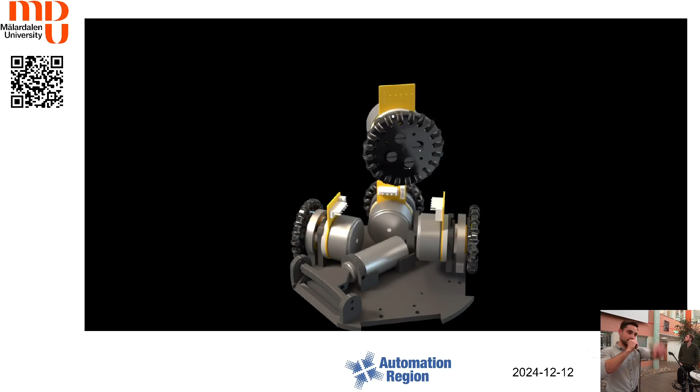Next, we will have a short demonstration of the robot that we actually built, and you can see it inside the room after this presentation.

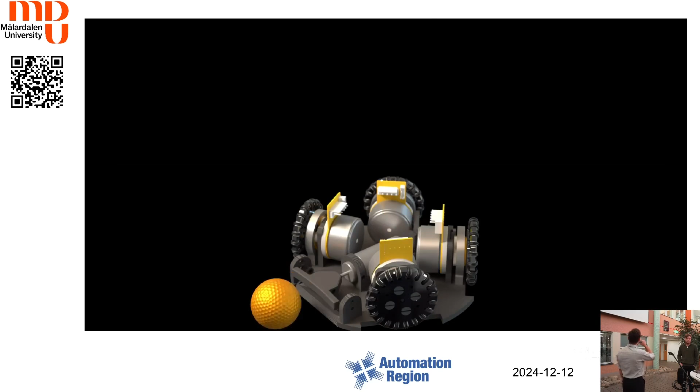I mentioned RoboCup twice at least. By raising hands, anyone of you not from my team, does anyone know what RoboCup is? One hand, two, three. A few. A lot of you don't even know what RoboCup is.

I expected it. Shortly, RoboCup is a competition designed to foster research in robotics and artificial intelligence, with the ultimate vision to compete in the FIFA World Cup 2050.

Very interesting. RoboCup has different leagues: small size league, middle size league, big size league, etc. We chose to compete in the small size league, which we call SSL. There you can see a quick picture. We have 2 teams, 6 robots in each team, and we have a golf ball - it's hard to see, it should be there somewhere. We will show it in further slides.

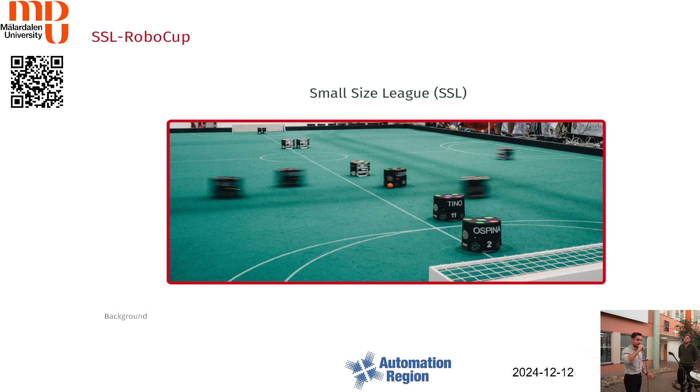SSL requires that we have 6 robots that automatically play football, which requires advanced algorithms for decision making, multi-robot coordination, and real-time problem solving. For that, we also focused on communication - we wanted to improve communication between the robots. Then we wanted to improve the vision system to clearly see the ball and the robots around. Lastly, to improve decision making, which is the AI, to take different decisions in different situations during the game, hopefully the right decisions.

Our goal was to build one robot, successfully verify and validate it. We will see if we came that far in further slides. I'm also pleased to mention that we had collaboration with Colombia and Panama. Teams from these countries helped us solve problems and get one step further to the new world of innovation.

With that being said, I'll leave the word to the hardware responsible. Hello, my name is Pontus, and I've been working alongside Muda as the hardware team leader, leading the hardware team in developing the robot. Today I will walk through how our robot functions and the components behind our design and how it works.

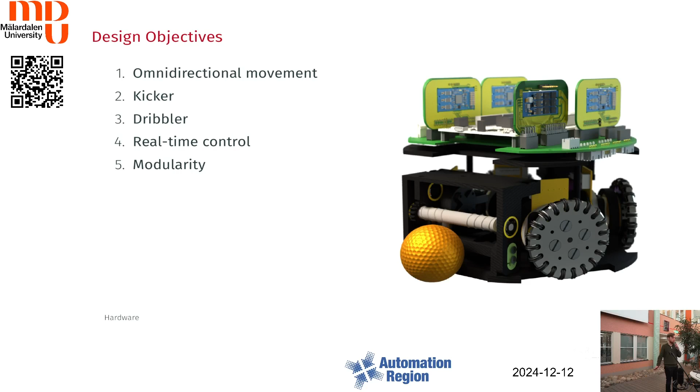In our design, we also thought about it being modular, so if a component breaks, it should be easy to swap out, or if future iterations of this project have improvements, they should be easy to integrate into this robot. Following the design objectives, we are using 4 brushless DC motors paired with Omni wheels in the configuration you can see here, which allows us to move the robot in any direction.

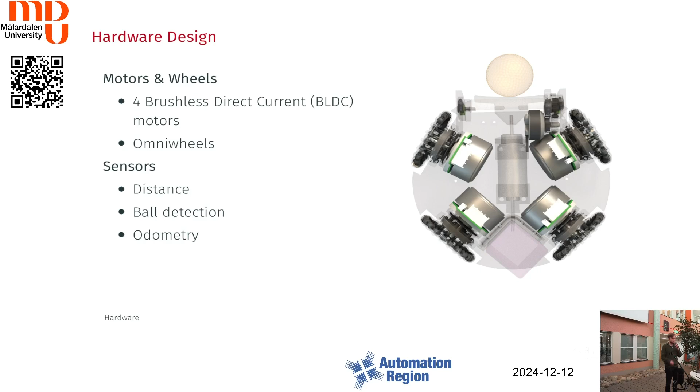And it has sensors as well, for detecting the other robots, ball detection, and odometry. Here are the sensors we used, chosen together with the team in Colombia to ensure we could collaborate and develop the hardware interface together.

We're using optical wheel encoders for the wheels to calculate the RPM of each motor. The motors also have Hall sensors integrated for precise motor control using field-oriented control. The robot also has a 9 degree of freedom IMU used to gather data for odometry. It has short and long range LiDAR to detect other robots and the distance to them, and lastly 2 sensors to track and sense the ball using an RGB sensor and a camera.

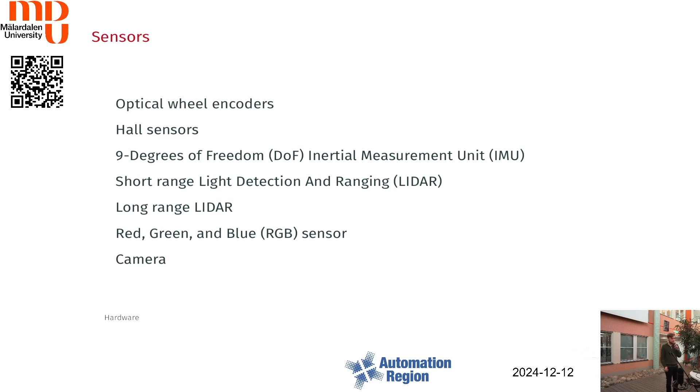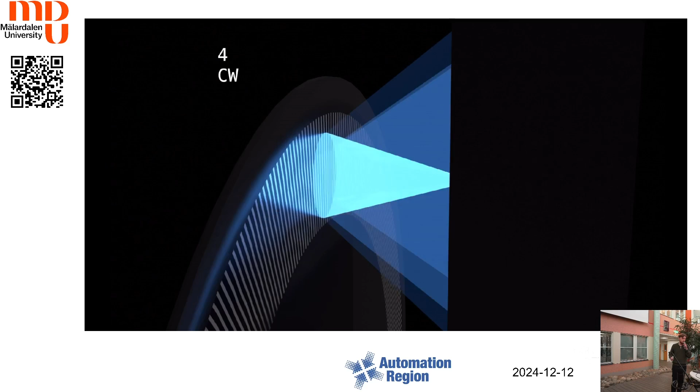Here's an animation of the wheel encoder and how it works. It has 2 receivers, a blue LED, and a disc attached to the motor shaft. When the LED emits, it hits the receivers, and that way we can know which way the encoder is spinning.

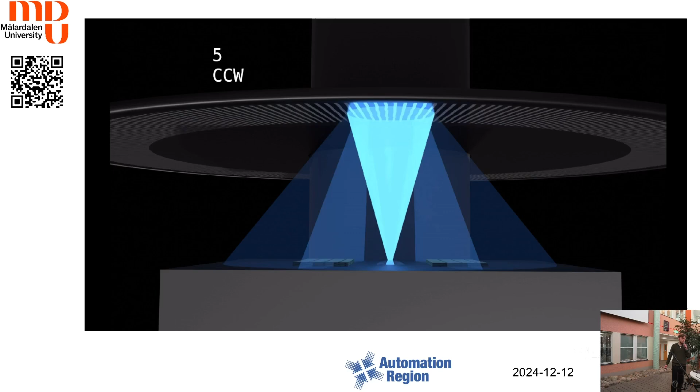We try to use off-the-shelf components wherever possible, but due to the size constraints of this robot, we needed to do some of our own design. We made a custom PCB where we integrated the power distribution and the data lines from the sensors to the microcontroller, and sockets for the electronic speed controllers.

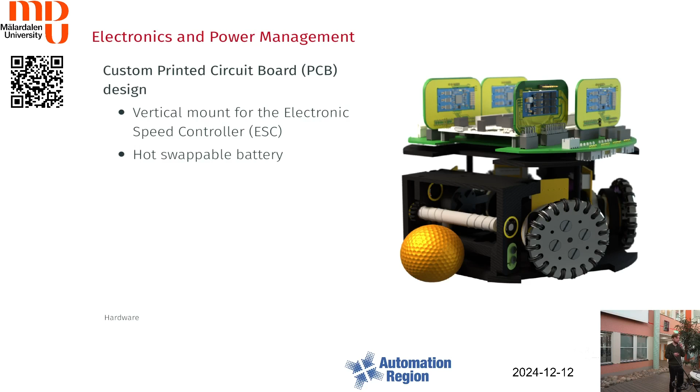We're using 5 BLDC motors in this robot, and each one requires its own motor driver. To fit this in the robot, we needed to mount them vertically, so we made an adapter for those - these are the blue ones here. The PCB also has 2 ports for power, to be able to hot swap the battery, so if one is running low we can plug in a new one without having to restart.

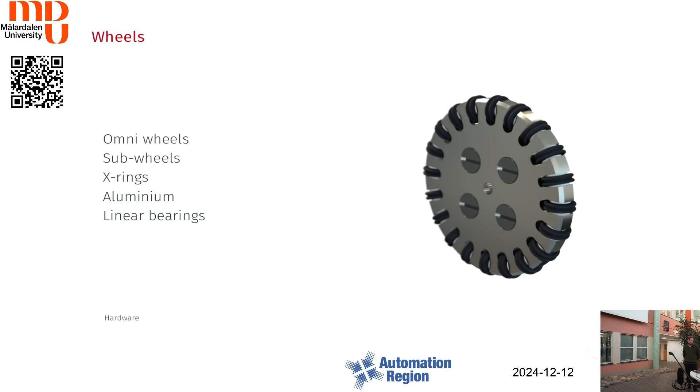The plastic just breaks. We have linear bearings, which we'll see in more detail. We have a linear bearing made out of TPE, and a linear bearing on each side made out of nylon. This helped reduce friction and helped dampen the wheels.

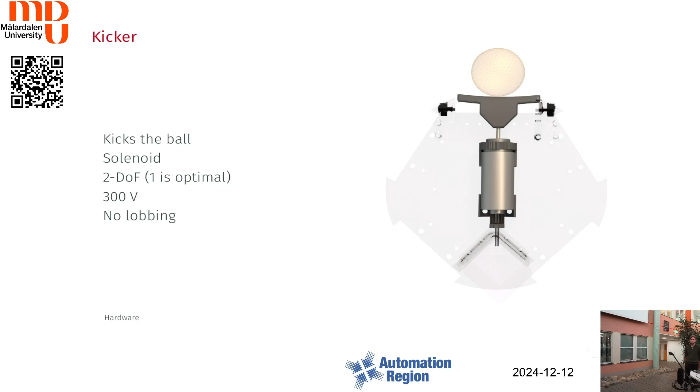Moving on to the kicker. As the name suggests, it kicks the ball, and it uses a solenoid - this part here, not very visible in the slides. It has 2 degrees of freedom, sadly, since the solenoid can also rotate. Optimally it should be just 1 degree of freedom. We use 300 volts to kick, and it has no lobbing capabilities. In more advanced teams, you can see they're actually capable of lobbing the ball, which is very impressive.

Moving on to the dribbler. It might not be very visible here, but it's a white bar with a spiral form. It's used to more easily control the ball. When you spin it at up to 20,000-30,000 RPMs, it will center the ball and keep it attached to the robot almost. It has some ball bearings to reduce friction - it's poorly visible, but there, and there. This, once again, to reduce friction.

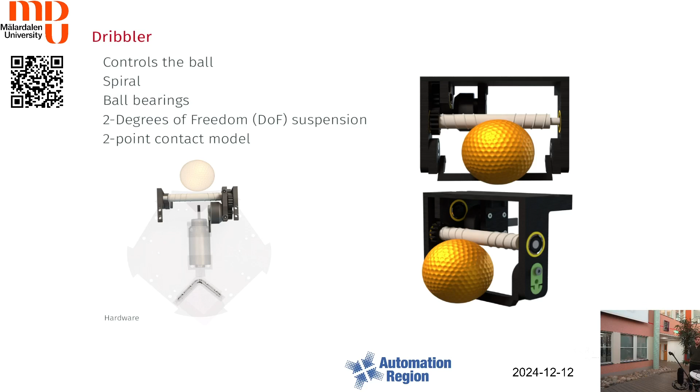We can also see the suspension visible here in green. It has 2 degrees of freedom, since we can dampen both in this direction and in this direction.

Moving on to the software. AI - my name is Victor Eriksson, I am responsible for the AI model in this project.

So we need a simulation environment, and in this case we have here grSim, provided from a previous team from Amirkabir University of Technology. From here we can communicate through the local host network interface, and get the positions and velocities of the robots and the ball, which we cannot see so clear. Also in the simulation, we can send in actions such as rotation and velocity for each robot in both teams.

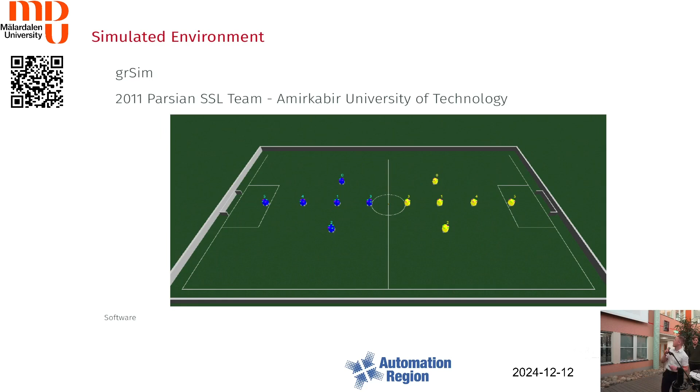So the AI model is a multi-agent proximal policy optimization, also known as MAPPO. It's a reinforcement learning model, meaning it learns from its previous actions and feedback - the more it plays, the more it learns. MAPPO is designed with a policy network and a critic network. In football terms, we can say the policy network is the player and the critic network is the coach. Together, both networks can be informed by predictions and estimations to get players to achieve a teamwork strategy. How well a team performs is assigned by us.

In our case, we have put that the distance to the ball is a negative value, so we want the players to get as close to the ball as possible to get a high reward.

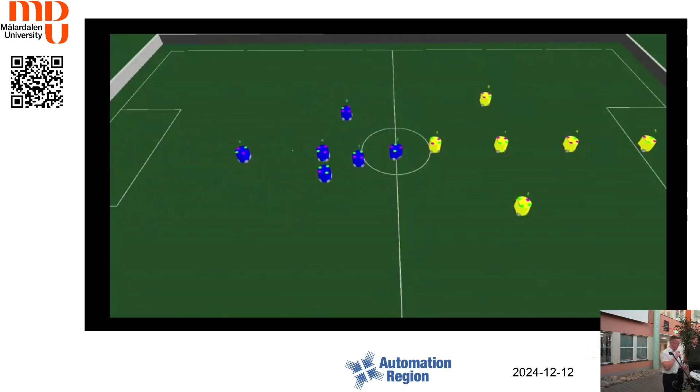The thing is that we could not really verify or train this model fully because it would take a lot of training iterations, and as we've seen from previous papers, we need a lot of them. It takes a lot of time to just do one iteration, and we're running this in just one instance. So sadly, we were not able to verify and train the model fully to see if it actually works as we want.

A critical part in our infrastructure is the use of ROS, or Robot Operating System.

I now regret my choice of colors, but we use it mainly for communication, since it gives simplicity. It's very easy to communicate. We can use topics, and then we have a subscriber, which is the one who obtains the information, and a publisher, which publishes the information to the topic. We also take benefit from its modular and reusable libraries.

One of these in particular, nav2, which offers localization, navigation, and path planning, all with very good performance. This helps save both time and effort, since we had something we knew worked well. There are two different versions of ROS we use, ROS 2 and MicroROS. We'll now see some more about MicroROS.

My name is Emil, and I've been working as a software developer, mainly responsible for IP communication and much of the hardware interface, the hardware drivers. I'm going to talk about the software we have in place in order for our AI path planning to be able to interact with the outside world.

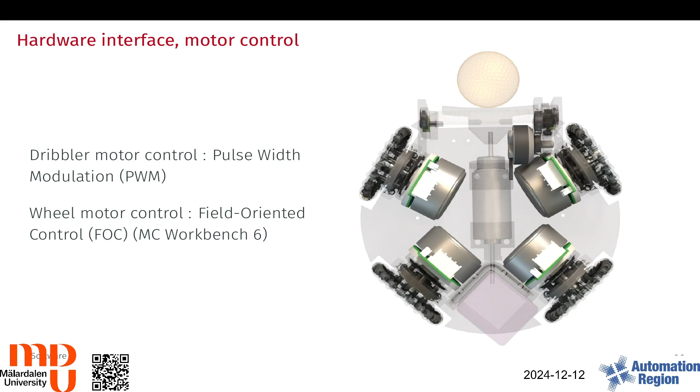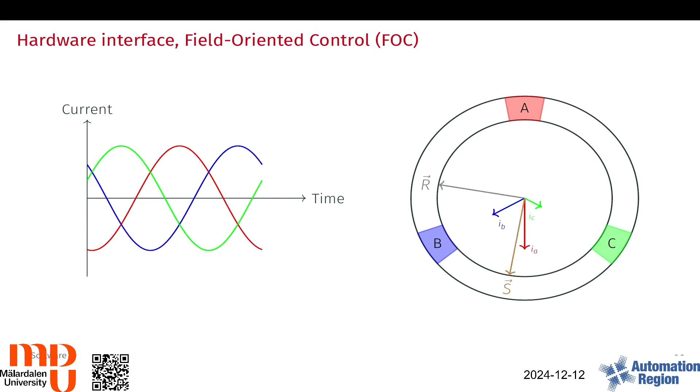So field-oriented control uses a transformation, which is outside the scope of this presentation, and then a PID controller to force these currents to make the stator vector perpendicular to the rotor vector.

Moving on to the middleman software, which runs on the Raspberry Pi. The Raspberry Pi code does many tasks. Amongst them is aiming and shooting.

When we get a command from the AI that we should shoot at a target, we have to ensure the robot is angled towards the target and then send a command to the hardware interface that we want to shoot.

We also have to do computer vision, so we can recognize the ball. And then we also do sensor fusion, mainly of the different odometry sensor information.

We also have localization of the robot. This is mainly because the SSL vision has some flaws. This localization is done using adaptive Monte Carlo localization.

We have local path planning, the DWB algorithm. It's what NAV2 calls their DWA algorithm. It's an extension, so it works for omnidirectional platforms.

And then we have their version of a global path planning algorithm called SMAC Planner. It uses A-star. The last four - sensor fusion, localization, local path planning, and global path planning - are all thanks to ROS and NAV2.

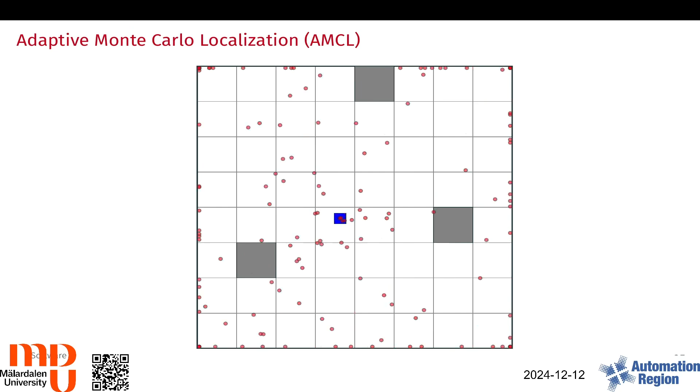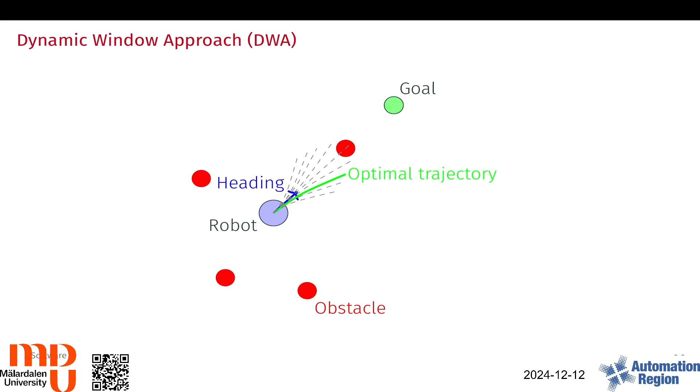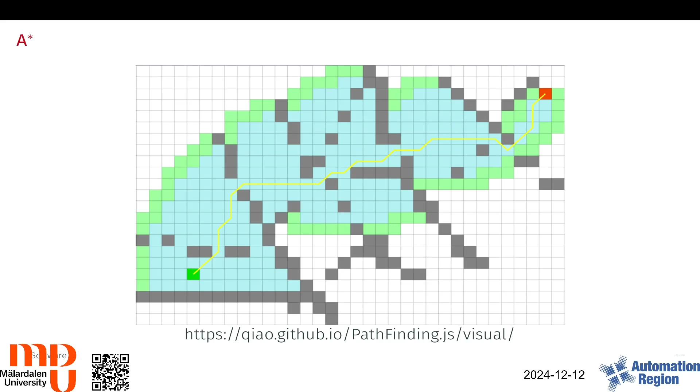So the blue ones are the ones we have searched. As we can see, it always moves towards the goal, rather than some other global path planning algorithms that would search everywhere. This is more optimal. Thank you.

Very well, very well. Focus now, because one of the most important parts is coming.

What can we conclude of all that? What did we do? As I mentioned at the beginning, we want to lay a solid foundation, a solid ground for the next groups to be able to continue developing this project, these robots, to do something with it.

Actually, it is true that we are the first group in the last decade in MDU that has done this project. Very interesting. I can say that we successfully laid a foundation for the next group to continue developing, without needing to redevelop anything we have developed. So that's a huge success for us.

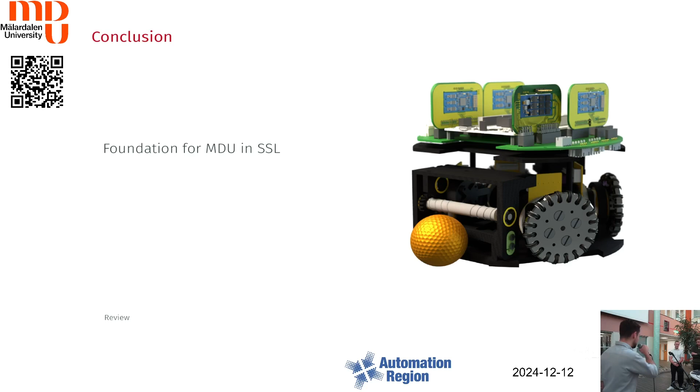We also have some recommendations for the next groups. What do we recommend that they do next? We believe communication is a critical part of this project.

We actually wanted to use Wi-Fi in the game. Then we discovered we will have so many distractions - it won't work basically, unless we have NASA-advanced components, which cost millions. However, we recommend that we further investigate radio frequency communication.

See what happened there - we didn't investigate it, we had no time to look at that. Further, we used MAPPO, as Victor mentioned, and MAPPO showed us some results, as you also demonstrated with your AI. We believe MAPPO should give good results if we have a better computer that can train the AI algorithm. So we also recommend looking further into that.

Finally, this is a picture of my lovely team that worked hard on this project. You will find them around here, hiding somewhere in the corner.

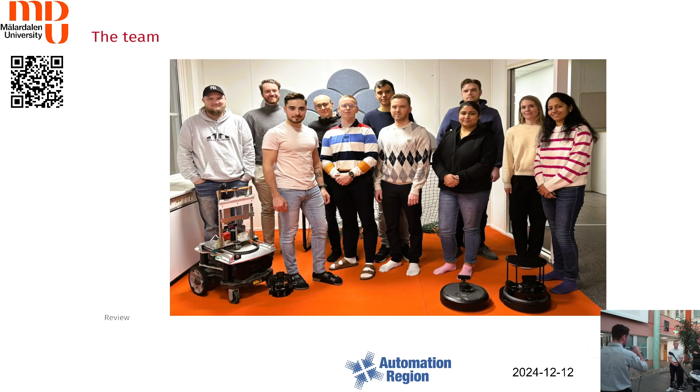And lastly, I want to say that today, my group, my teachers, everyone that contributed to this project, shared their journey to build smarter, faster, and more collaborative robots, to ensure that they will be used not just in a soccer project, but for technology as a whole.

So I want to leave you with the same question we started with: do you believe that RoboCup will be able to compete and win against the best team in a football game in 2050? No answer needed, just think about it. Thank you.